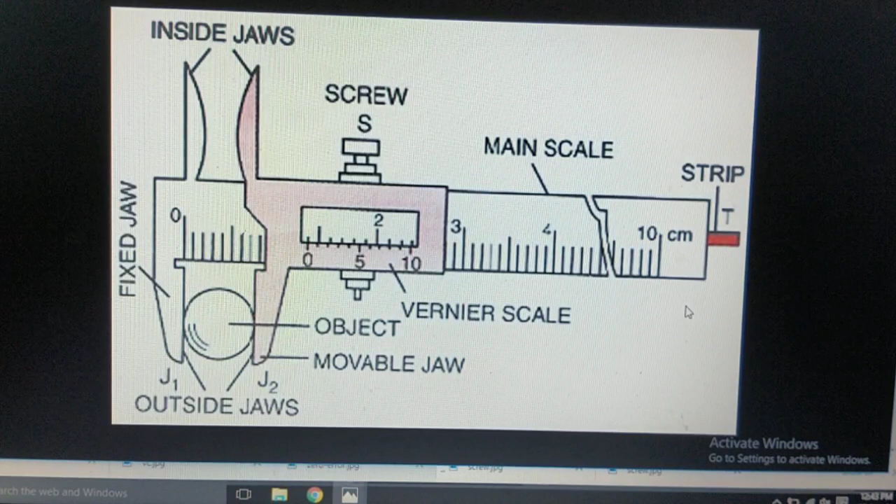Along with the main scale, we had this pink colored vernier scale also, and this vernier scale has divisions on it, from 0 to 10, 10 divisions. The main scale can be as long as depends upon the length of an instrument. Using these two scales, we could measure the outside diameter of an object, and by using these inside jaws, we could measure the inside diameters of an object.

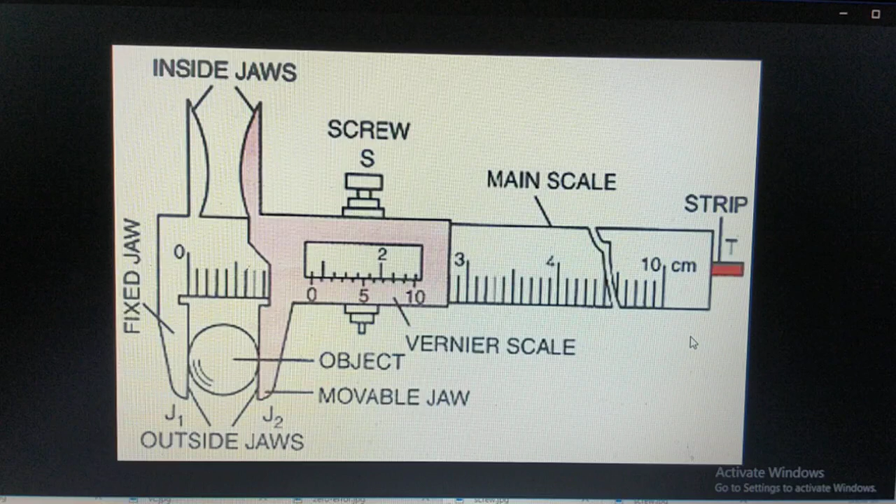These vernier scales helped us to improve our measurement. Like I gave you an example, my measurement was let's say 6 mm, and after using the vernier scale I got the accuracy of 6.7 mm, 0.1 decimal. That means the accuracy has increased by 1 decimal place using this vernier caliper.

Now the second instrument which we will study is screw gauge, to further improve the accuracy of an instrument. Let's say I want not 1 decimal but 2 decimal places, let's say I want the reading as 6.72 mm. So how to do that? And if I want to measure the diameters of very thin objects...

Let's say I want to measure the diameter of a wire. You can see this wire, a very thin wire. If I want to measure the diameter of this wire, how to do that? That can be done by using screw gauge.

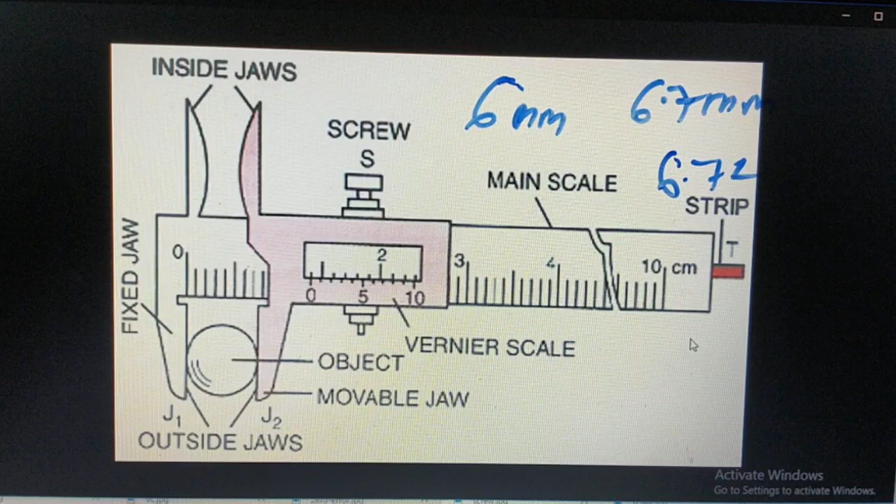So I'll show you the diagram of screw gauge. Keep the textbooks open in front of you and keep looking at the diagram which is there in the textbook also, because ultimately we have to use that diagram. I'll show you the original instrument and the diagram as well. This is the diagram of a screw gauge. You have the diagram in textbook also. Just compare the diagram, we'll see each and every part.

So this part here is called as the stud. Here it is named as anvil. Anvil is another name for stud. In your textbook it is named as stud.

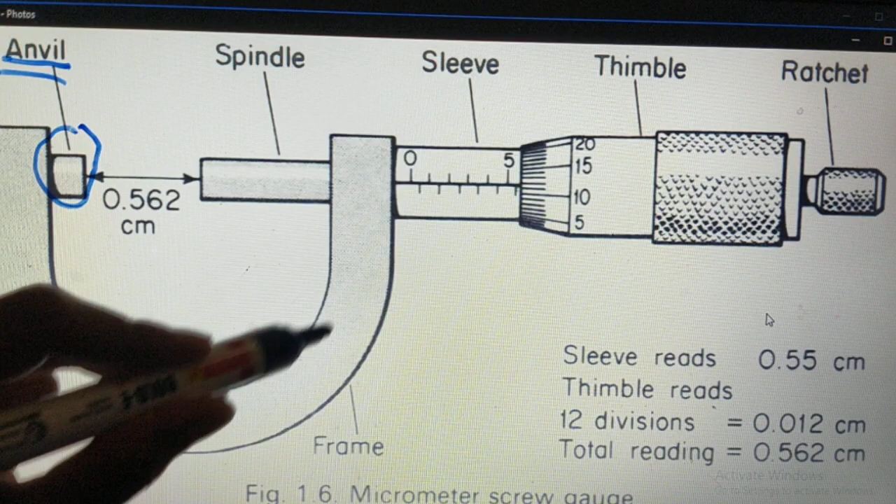Now this is the U frame, U-shaped frame, and you can see two important names here. One is sleeve, and another is thimble. This sleeve is nothing but the main scale. You can see the reading here. Here this is the main scale. And this thimble is the screw.

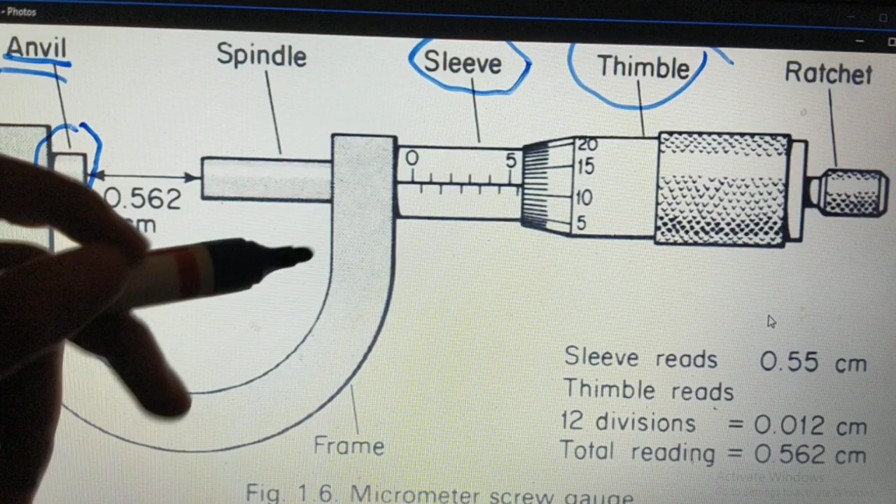How does it work? What is the reading, how to calculate the reading? All this will be done later. Just understand the labeling of this instrument first. So this circular reading here is called as the circular scale, and this part is known as the thimble. Thimble is also called as the circular scale. You have to remember the other name: sleeve is called as main scale, thimble is called as circular scale.

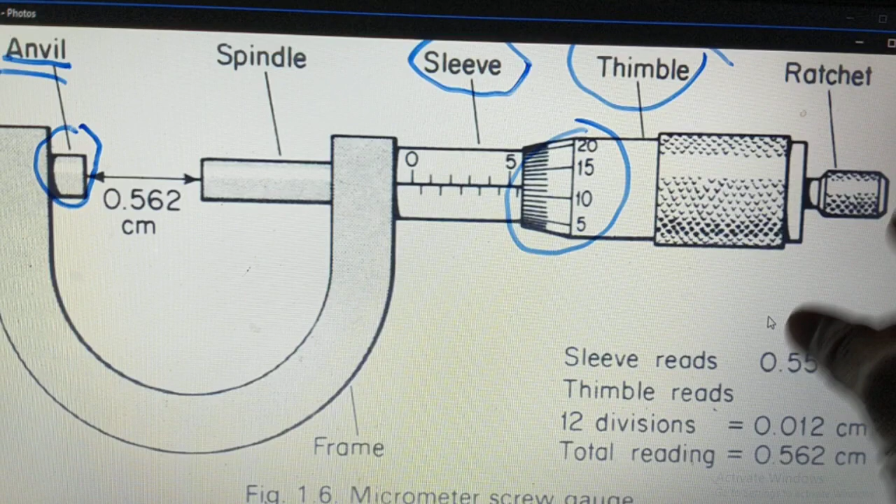Now this ratchet here, you can read the word ratchet. When you rotate this ratchet, like when I rotate it like this, the screw will move ahead. We'll see the demonstration. When we rotate the ratchet, the screw will move ahead. So this part here, you can see the spindle. This spindle will move inside and outside depending upon the rotation of this ratchet.

The object which you place is kept here between the stud and the spindle. Depending upon the size of the object, you will rotate this ratchet and this screw will move, and we will keep the object here. So I hope the labeling of the screw gauge is clear to you. This line of the main scale is also called as the base line. In the diagram in your textbook you can see the base lines, and this spindle is nothing but a screw.

Here there are marks like a screw here, and once again I tell you, this thimble is the circular scale and this sleeve here is the main scale.

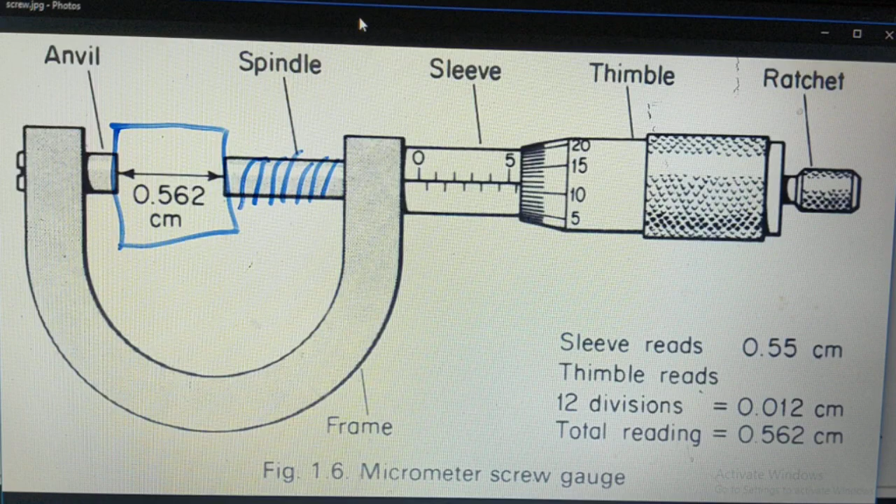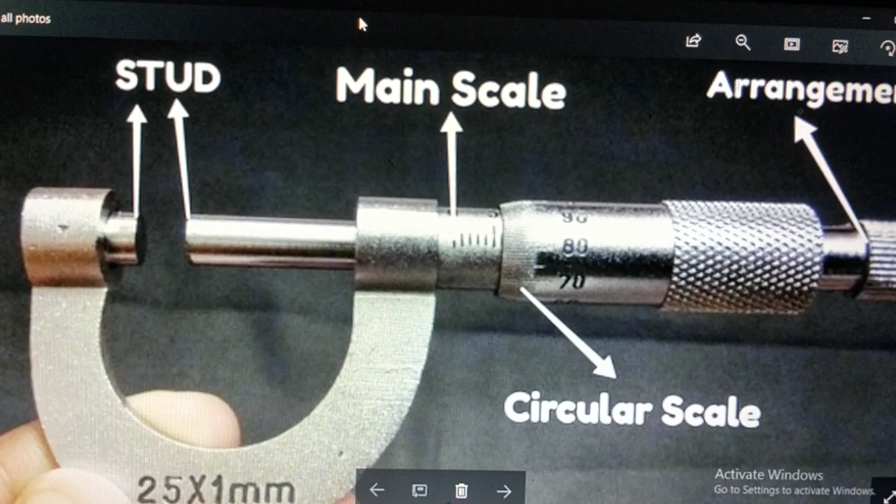I'll show you another diagram of a screw gauge. See, in reality a screw gauge looks like this. It is silver in color, and you can see here that how there is a space here. When we move this ratchet, see, this is a screw like object. When you move this, the screw will move inside and you will keep the object here. Object will be kept here. This is the U frame.

This is the measurement, the maximum measurement up to which the screw gauge can work. And you can see this main scale. This is basically I wanted to show you the color of the screw gauge and how it looks. It is made up of metal.

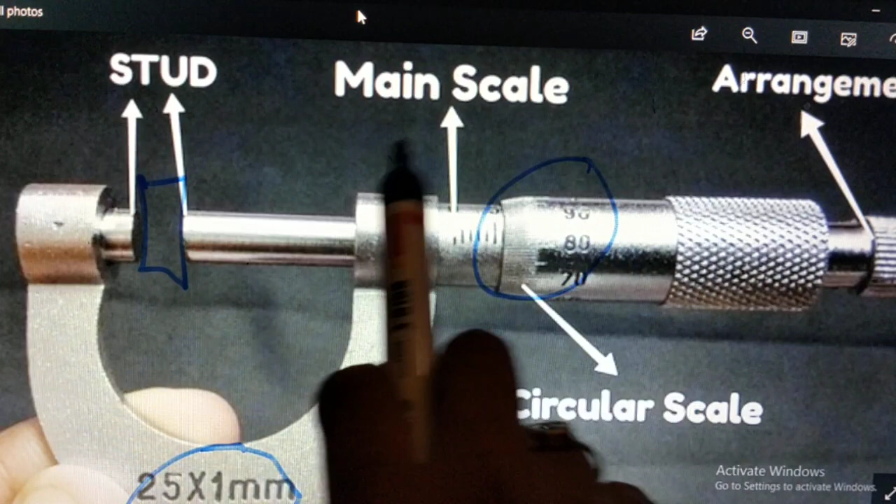This circular scale is very important. The main scale gives us the basic reading of the screw gauge, and the circular scale gives us the reading after the decimal point - the accurate, extra reading we get is because of this circular scale. So let's start with the working of the screw gauge now.

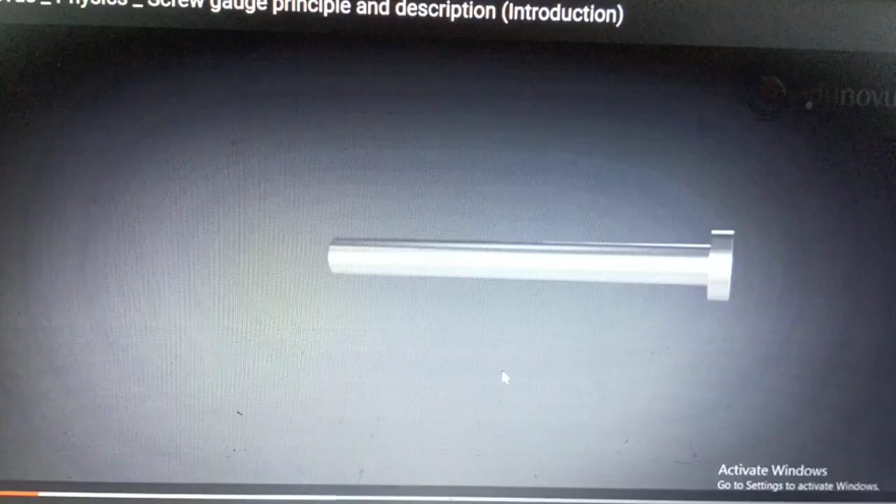You can see this, a normal screw. Using this screw, I will make you understand the working of the screw gauge. Since we are all stuck at home, it is not possible to show you the actual instrument, so I have tried to source many videos and pictures from YouTube to explain the concept. So this is a basic screw here.

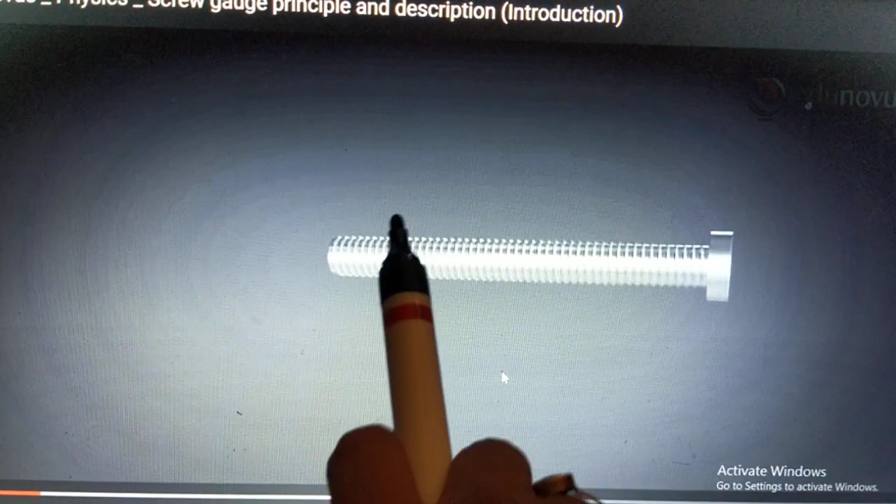This screw has these lines on it. I'll show you these lines on the screw. These lines are called the threads on the screw.

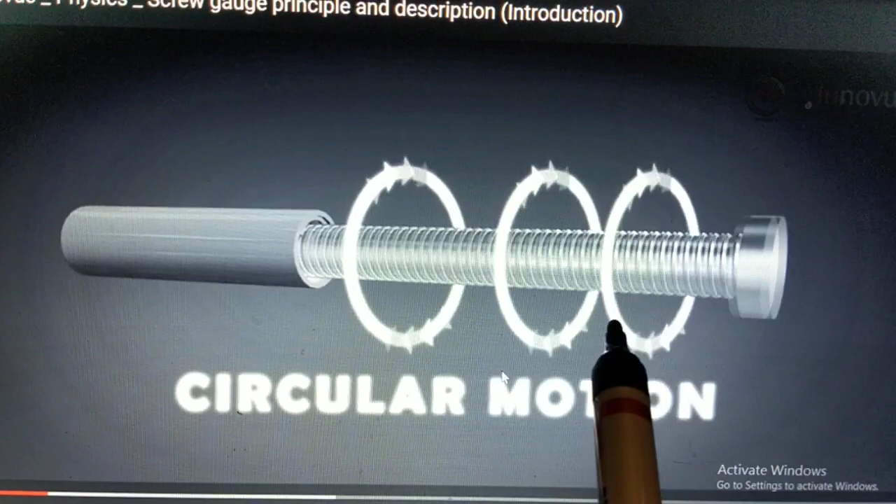Now when you rotate the screw, the screw moves inside the object, whichever object you have. See how it is done - you are rotating the screw. This is the rotational motion, and let's say the screw was here and it reached here. You can see after this rotation, the initial position of the screw was here, and now it has reached here after rotating.

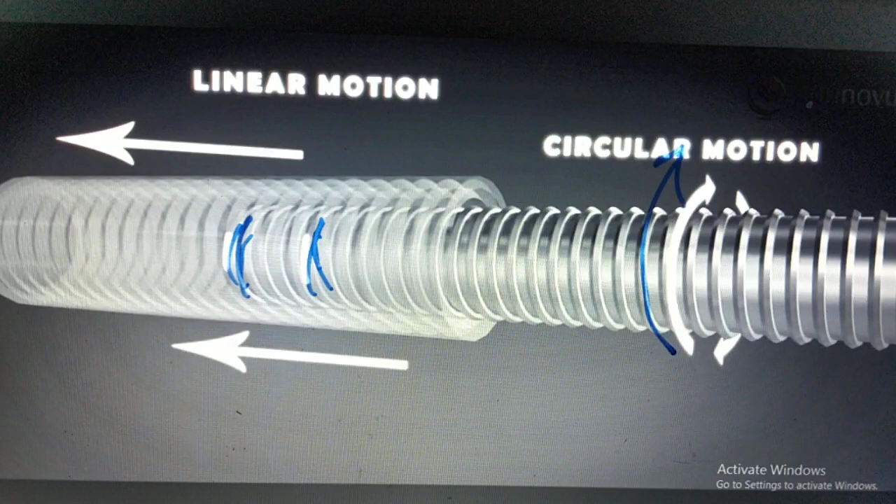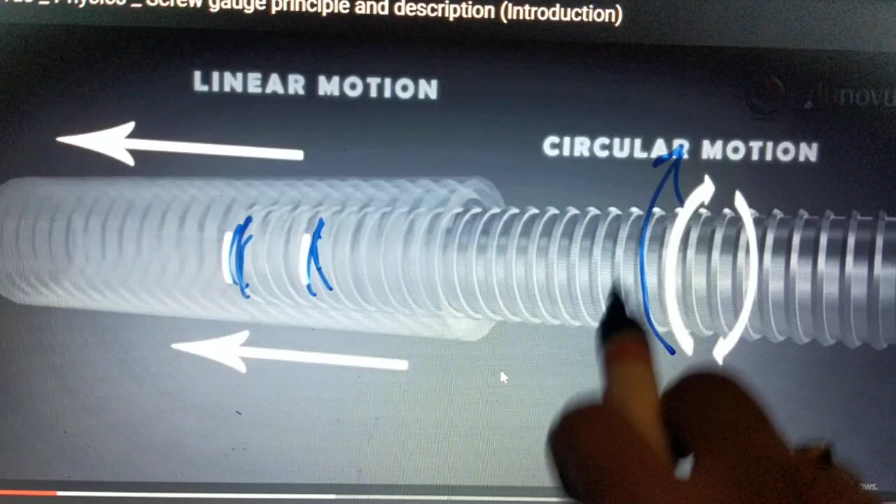After the rotation, it has moved from the initial position to the final position. These positions of the screw after rotating - this is circular motion, and we are getting a linear motion here. This distance which the screw travels in one rotation is the distance traveled by the screw when we rotated the screw once.

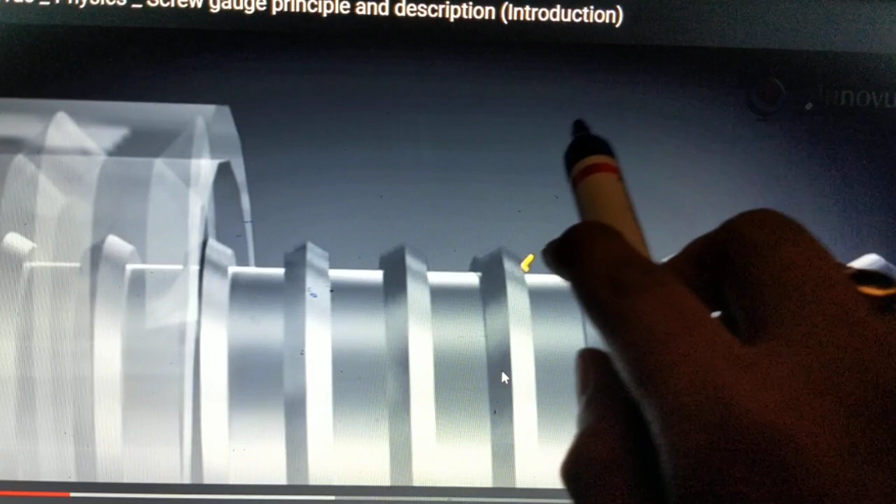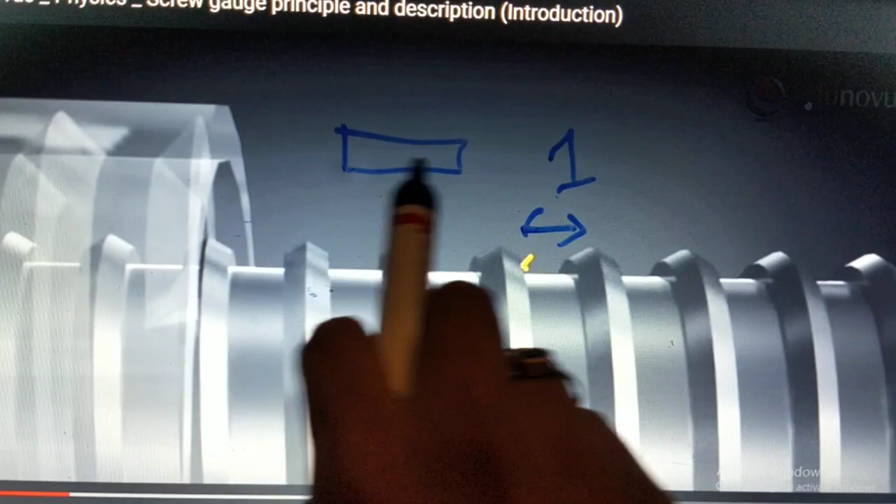But let's go deeper into it, let's take a closer look. These are the consecutive threads of the screw, and when you rotate the screw one time, it travels this much distance. Let's say this is a screw - when you rotate this screw once, it will move some distance inside. How much is that distance? This is the distance between these two thread lines.

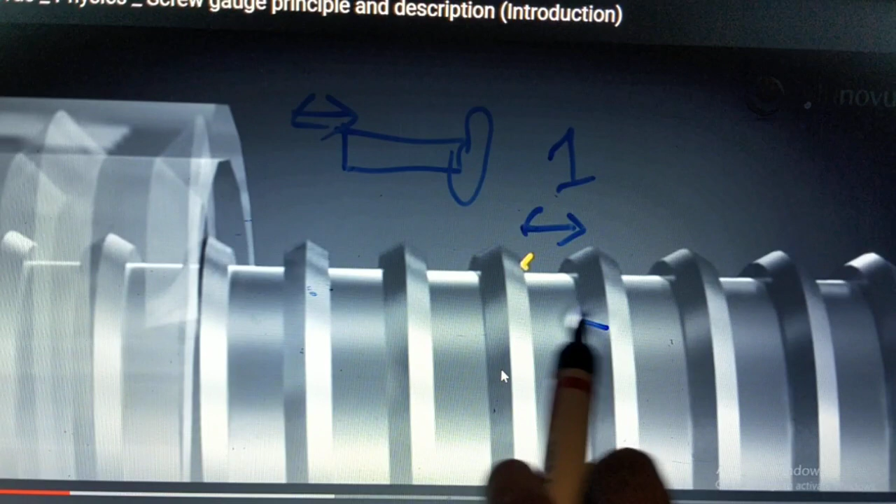In easy language, if I explain to you - this is a screw, and if you rotate it once, one rotation, it will travel this much distance. Then on the second rotation it will travel this much more distance, on the third rotation this much, on the fourth rotation this much. So it covers one thread per rotation.

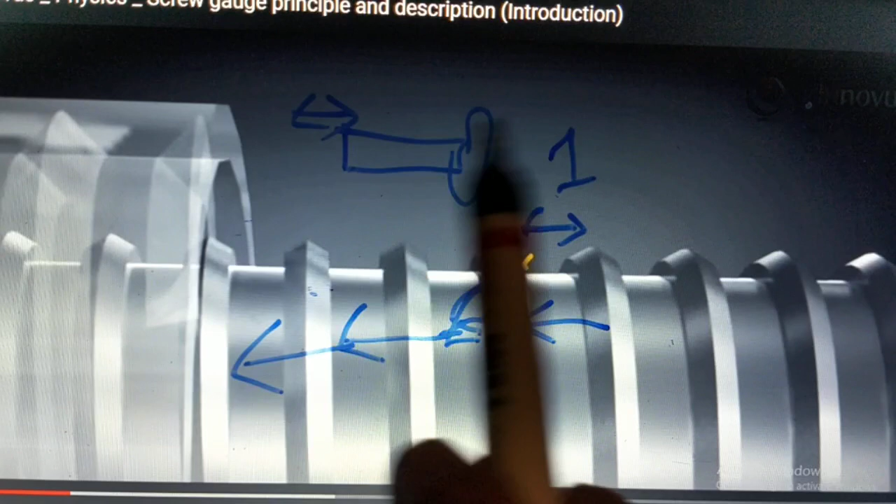So what is the significance of this? This distance which the screw travels in one rotation is called the pitch of the screw. Pitch is a very important part in the screw gauge, that is why I showed you this video - what is pitch, it means the distance traveled when we rotate the screw once. The definition of pitch is: the distance traveled by the screw in one rotation is called the pitch.

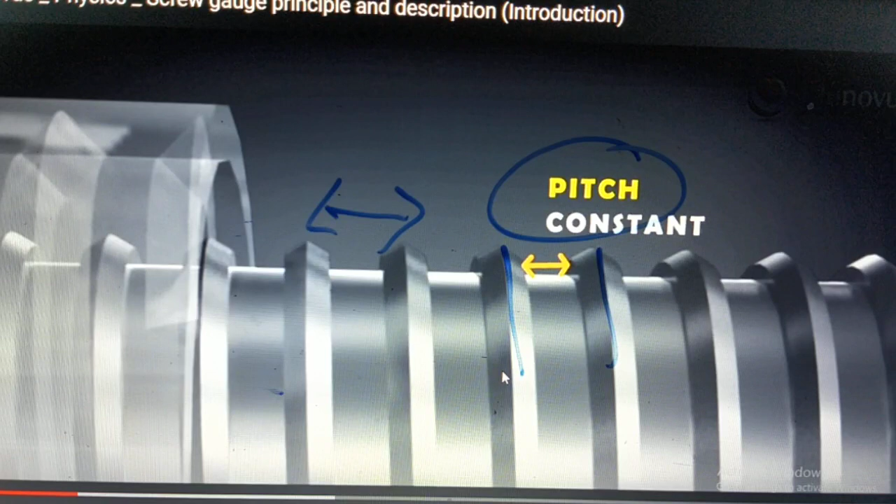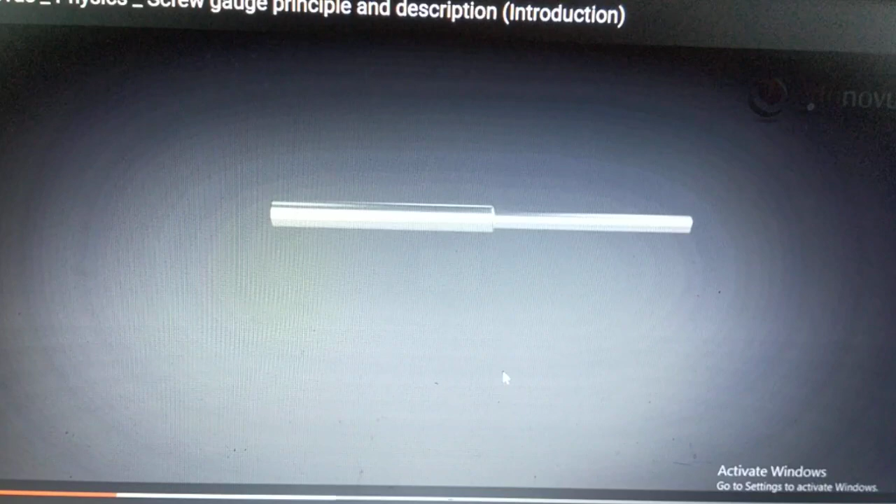So here you can see this is the distance. Now let's understand how this screw is fit inside the screw gauge. See this part now - you can see the screw fit inside the part, and this makes the main scale of the screw gauge. This part is the main scale of the screw gauge. Further, it has readings on it, and along with this main scale we have the U frame - this is the U frame.

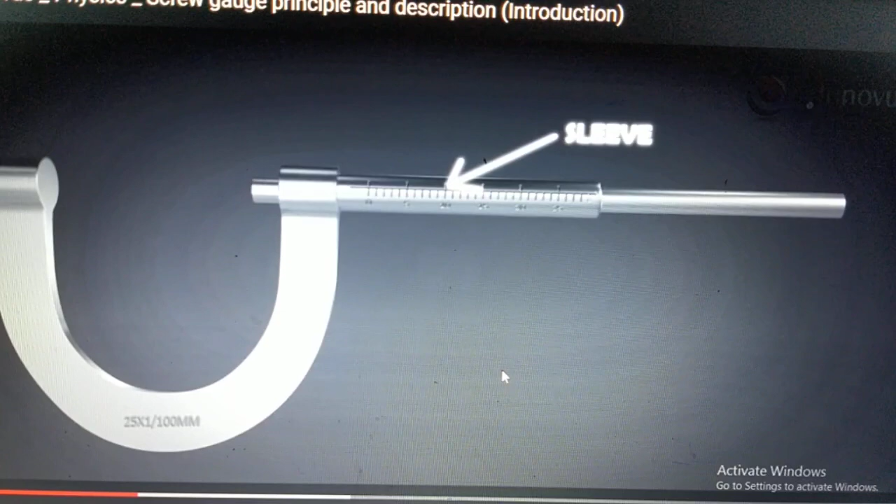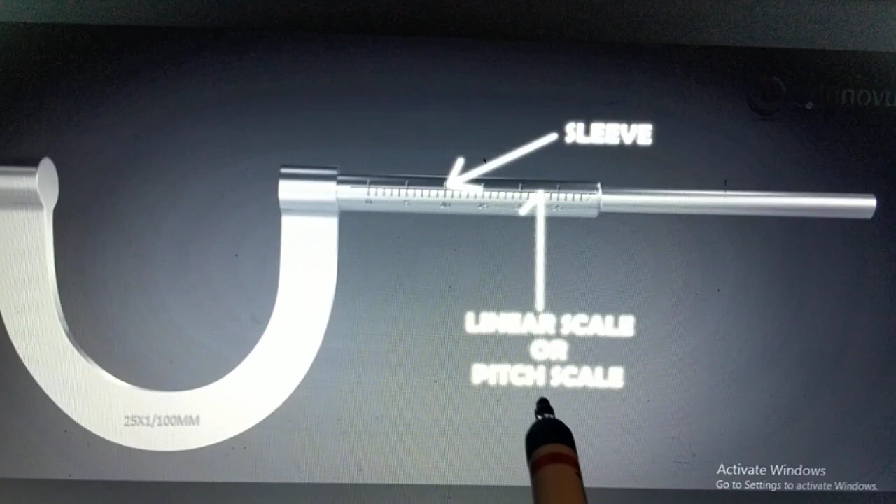You can see the readings here. I'll make you understand how these readings work. This was the main scale, which we call the sleeve - so this is the reading of the main scale. So you understood what is a sleeve - the sleeve is this main scale. This main scale is also called the linear scale or the pitch scale, linear because it moves in a horizontal direction.

Here is the stud - you keep the object here, we fix the object like this. You saw this is the object, this is the stud, and this is the spindle. When you move the screw from here, you fix the object. Now how to move this screw? By using the ratchet.

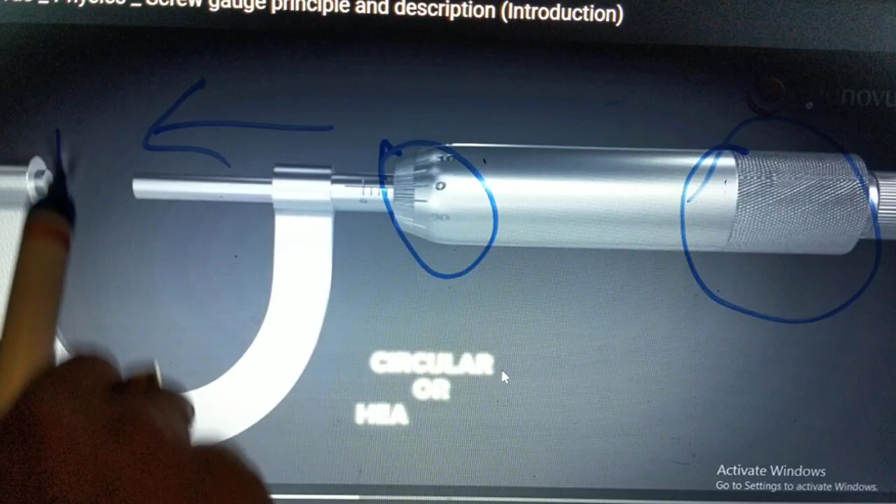So you will see how we place this, which is made here - it's the circular scale, and this is the ratchet. You can see this part, this is the ratchet. Using this ratchet I will move the spindle, and it will move left and right, in and out, depending upon the size of the object. Now this measurement here is called the circular scale or the head scale.

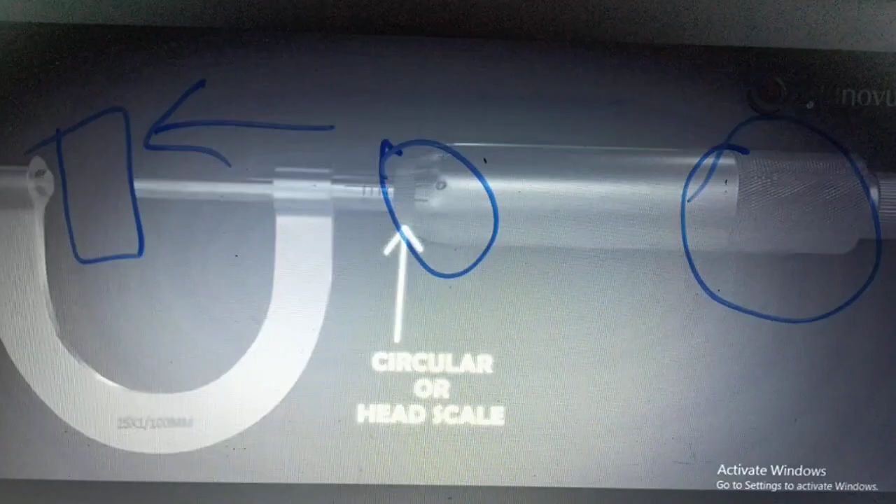Now, by doing an experiment, let's understand how to measure the size of an object using a screw gauge. For that, I'll show you another video.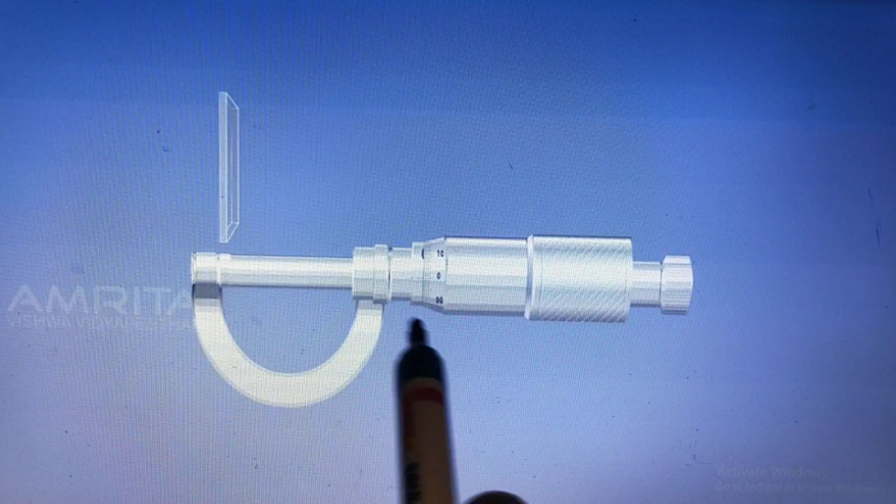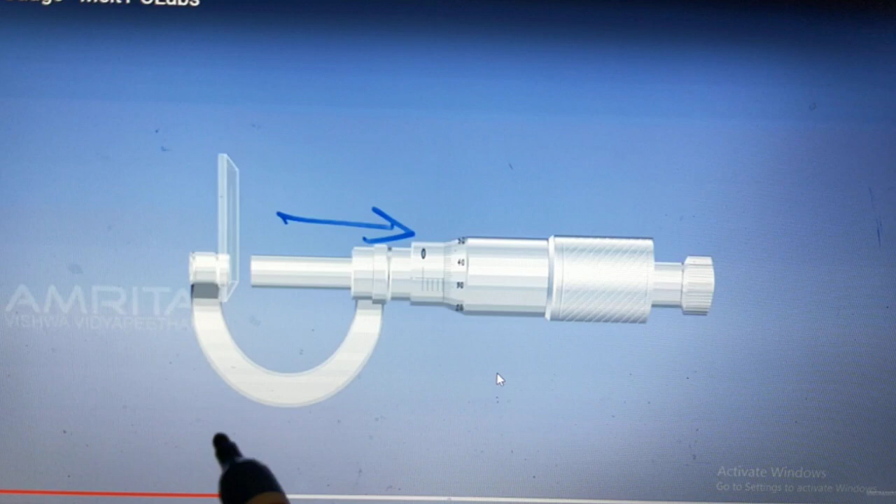See, this is the U frame, and we will place the glass here. We rotated this ratchet, so the screw moved outwards, and we will place the glass slab here, this piece of glass. Okay, and I want to measure the width of this glass.

Now we will tighten the screw. Once it is fixed, once this measurement is done, now let's learn how the reading is taken. How do we read the numbers from the screw gauge?

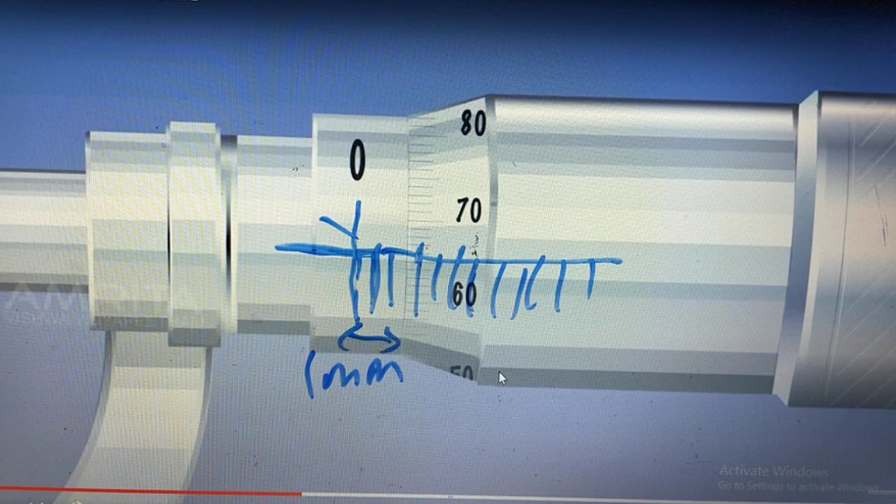I told you before that this is the main scale, the main reading. This is the zero line, first line, second line, and it is inside this screw. The remaining readings are the main scale readings, and they are inside the screw. The distance between these two lines is 1 mm.

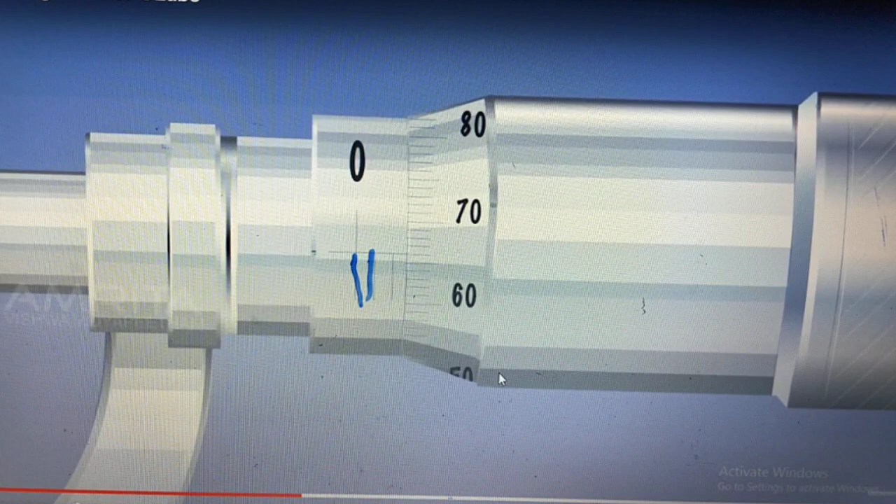Now once we have placed the object, we will see what the reading is on this main scale. How to count the reading? See, this is 1 mm, this is 2 mm, and after 2 mm I don't have a line, it is hidden. So the reading on the main scale in this case is 2 mm. I can count 2 lines, so that means the reading is 2 mm.

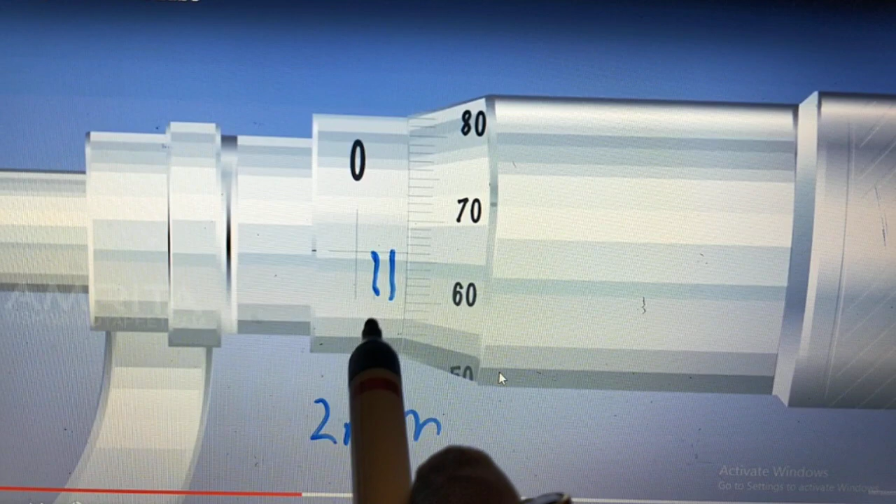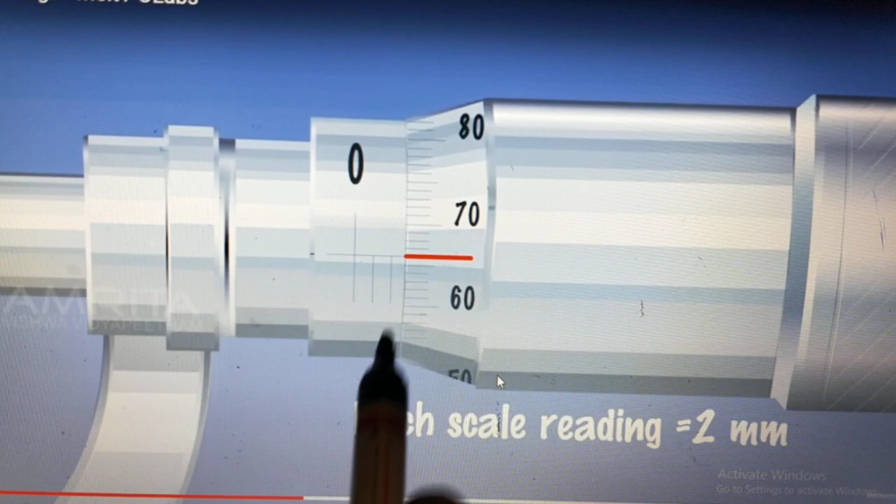Now let's see how to take the circular scale reading. This reading is also called the head scale. As I told you, the main scale is also called the pitch scale. See this, you can see the pitch reading. This was the pitch reading, and now when you have rotated the scale, the numbers have changed.

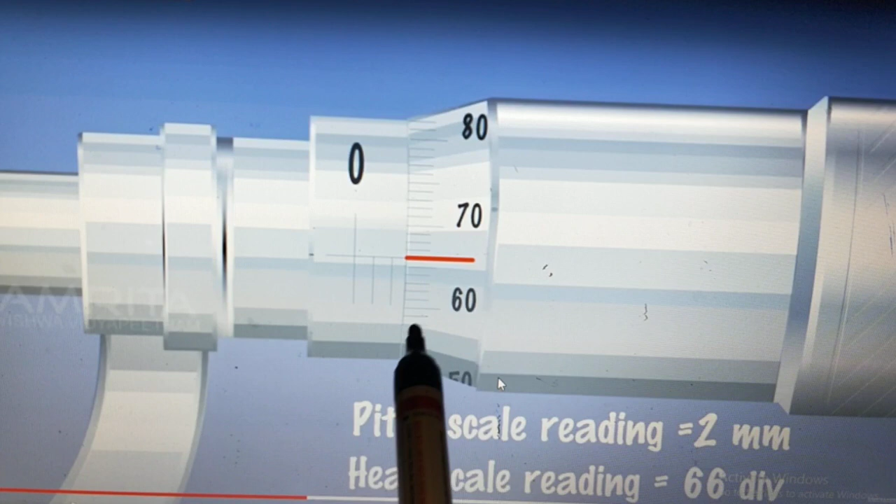You have to see which reading on this circular scale is coinciding with this baseline. When we are rotating this screw, you had rotated it, and because of the rotation the reading here changed. Now we have to see that this line is coinciding with the main scale, so according to which we'll take the reading. First this is the pitch scale reading, 2 mm, and here when we count the division, this is 60, then 61, 62, 63, 64, 65, 66. So this division, the 66th division, is coinciding with the baseline.

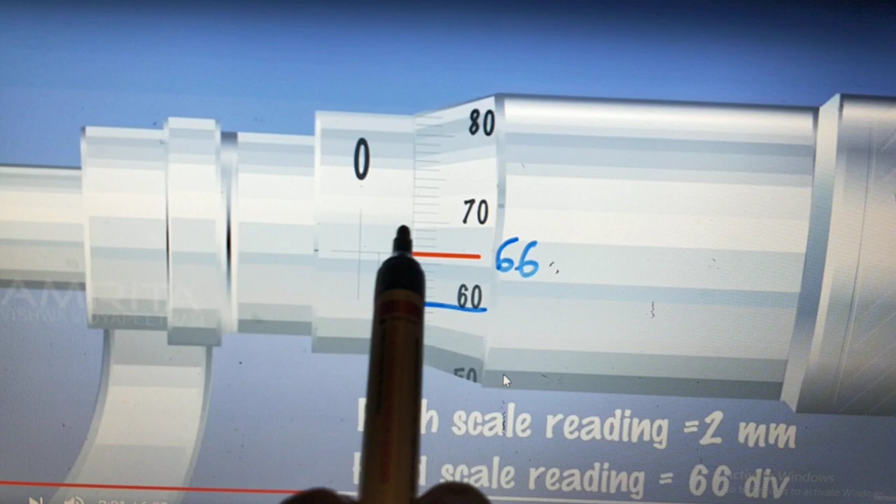So here it is written the pitch scale reading is 2 mm. Pitch scale means main scale, and the head scale means circular scale. This is the circular scale. This reading is 66 divisions.

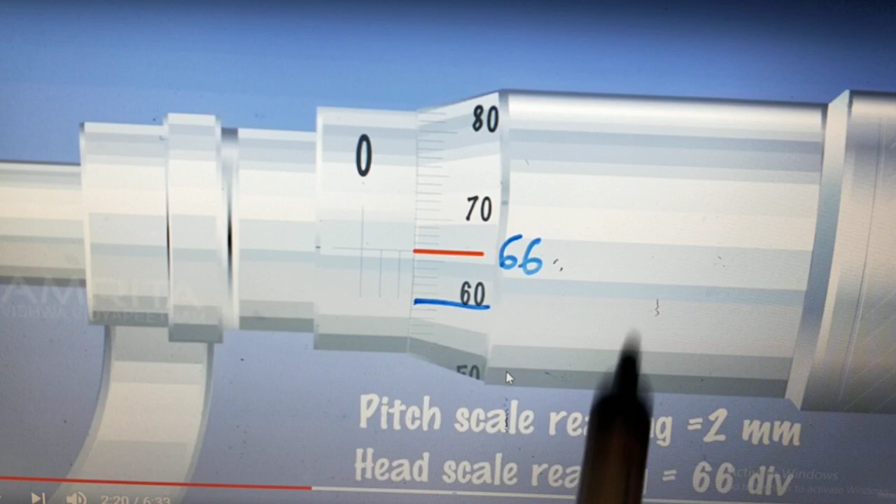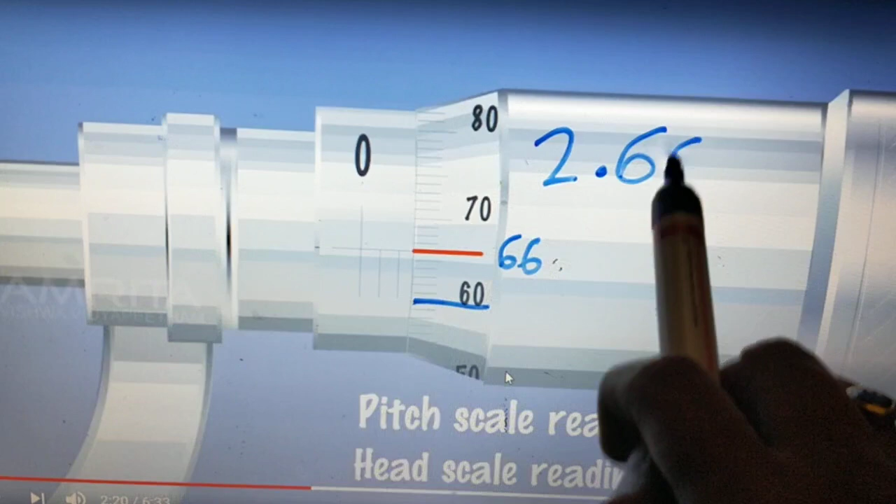Now how to write the final reading? We know that the main scale reading was 2 mm, correct? And here which division is coinciding? The 66th division. That means the reading is 2.66 mm. Normally our main scale would have given us the reading as 2 mm, but by using this screw gauge we got an accuracy of 2 decimal places. Now the reading is 2.66 mm.

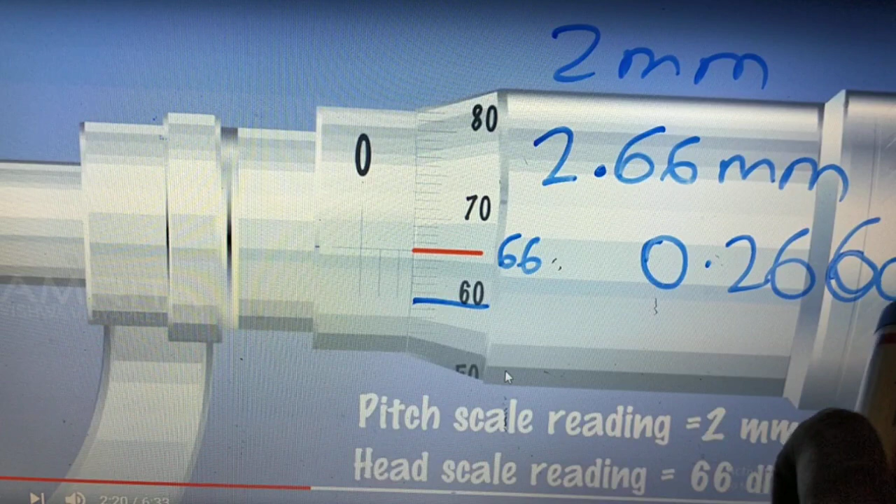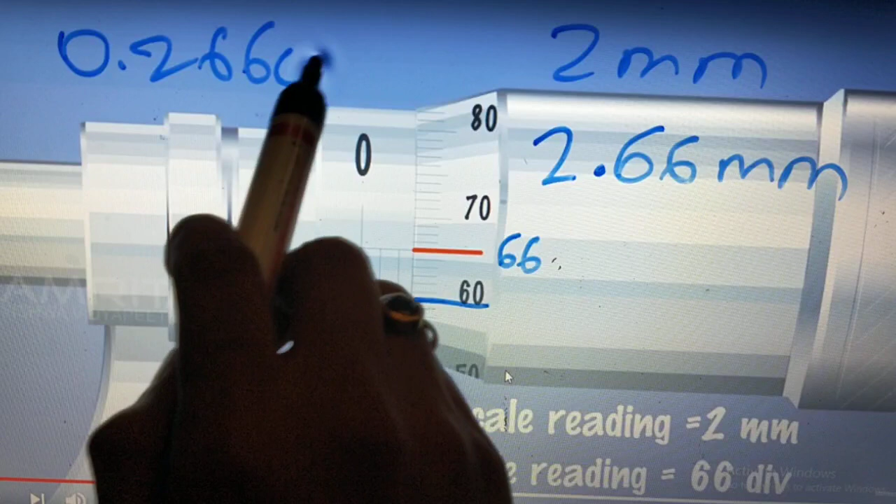If you convert this reading into centimeters, it will be... I think it is not visible, just a second. When I convert this into centimeters, I will get the reading as 0.266 centimeters. When you convert into centimeters, the decimal place is shifted to the left hand side.

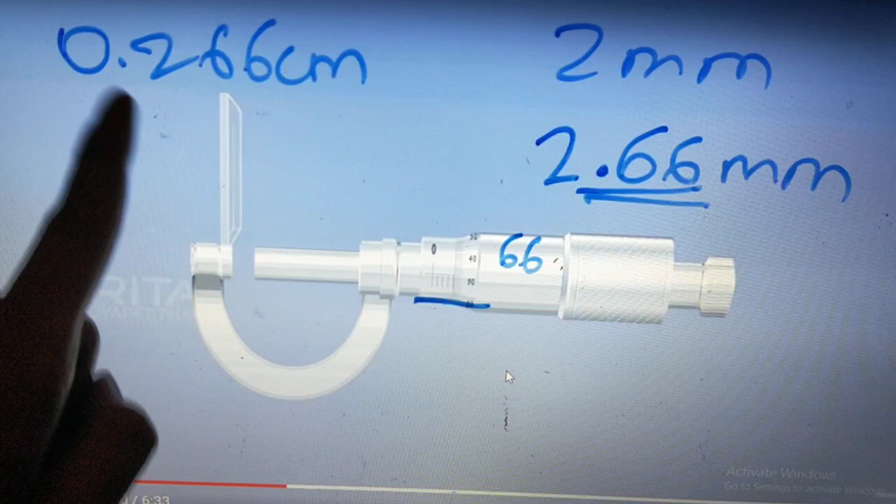So you understand that by using the screw gauge method, our accuracy has increased by 2 decimal places. Let's take one more example. This was the example of measuring the width of a glass plate. If you remember, we had inserted a glass plate here and measured its width. You have to understand that the width is very less, so this 0.266 centimeter - the width of a glass is always very less.

Let's see how to measure the diameter of a small sphere using this screw gauge. This is a very small sphere. We will place this sphere here by moving the ratchet.

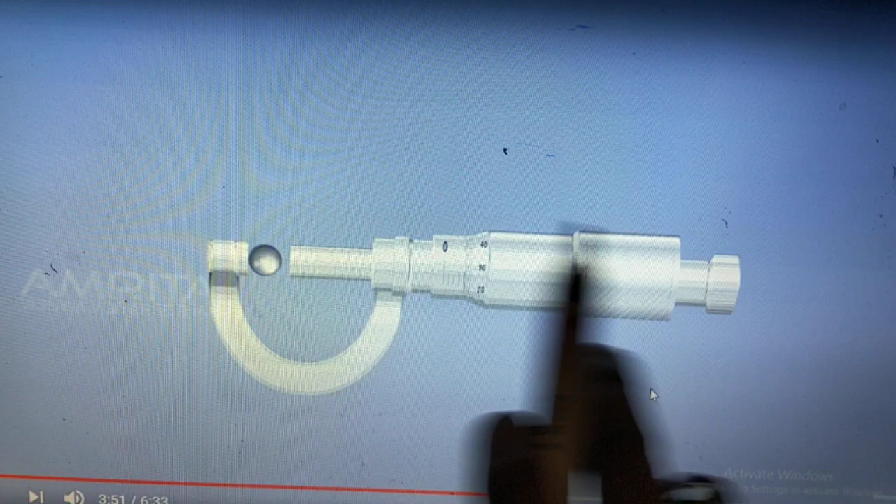See this. When we moved this screw, the ratchet is used. The ratchet is turned and the screw is moved, and we place the ball here and fix the screw now.

Now it is fixed, and according to this the reading here changes. See, if you observe the circular scale, it moves and changes the reading.

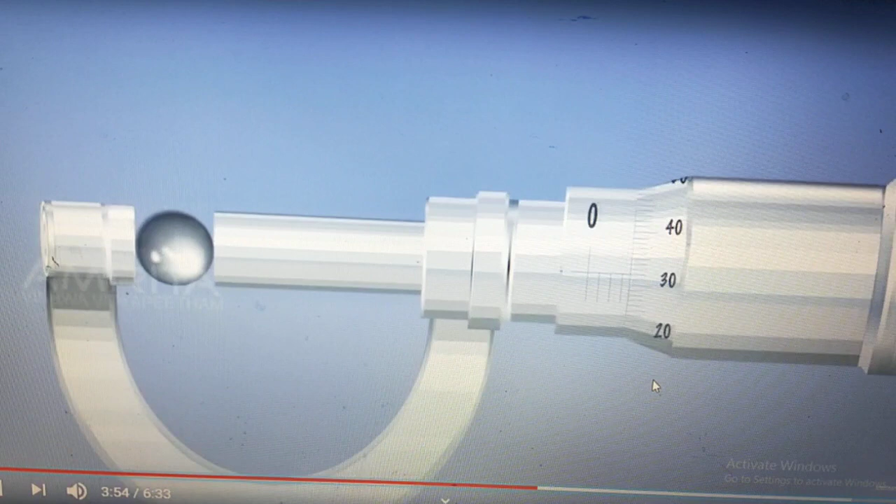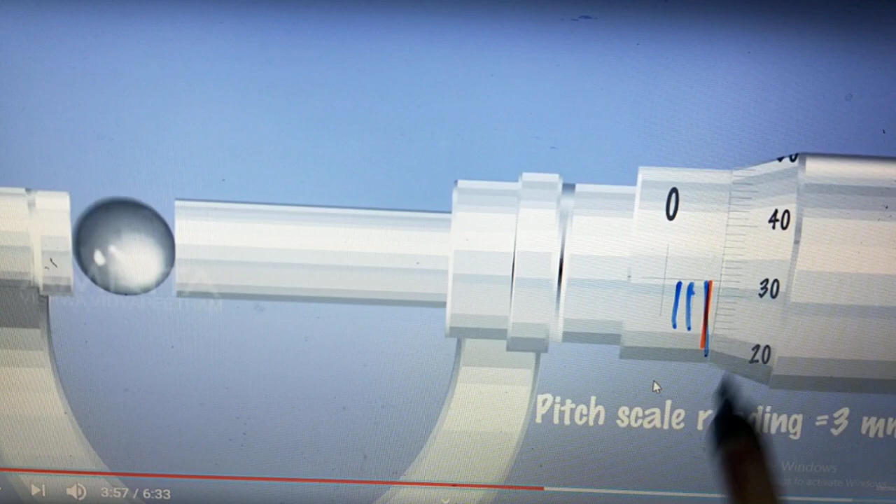Now let's zoom in and see the measurement. First we count the main scale reading. The main scale reading here is 1, 2 and 3 - we can see 3 lines. That means the main scale reading is 3 mm, which is also called the pitch scale reading.

This is also called the pitch scale reading. It is 3 mm in this case. So this is the main scale reading, 3 mm. Now let's see which division is coinciding with the main scale.

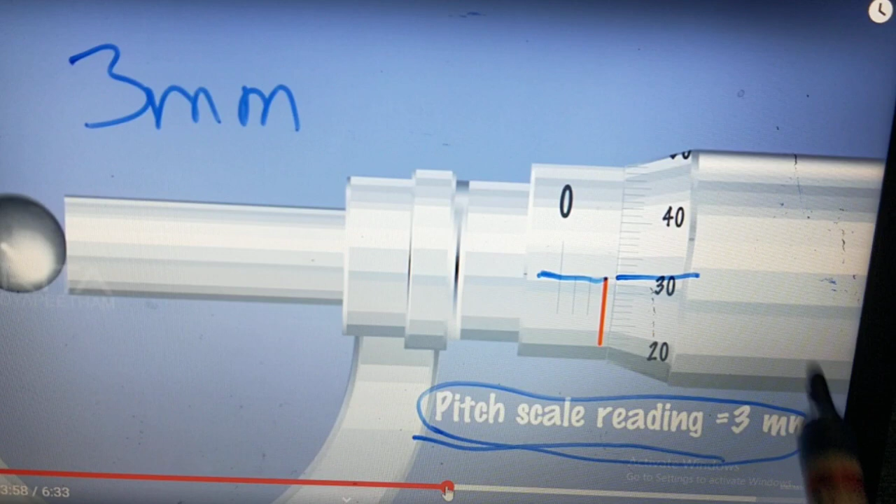So which division is this? Let's see, this division is coinciding, and it is the 32nd division coinciding with the main scale. The 32nd division is coinciding. That means the measurement is

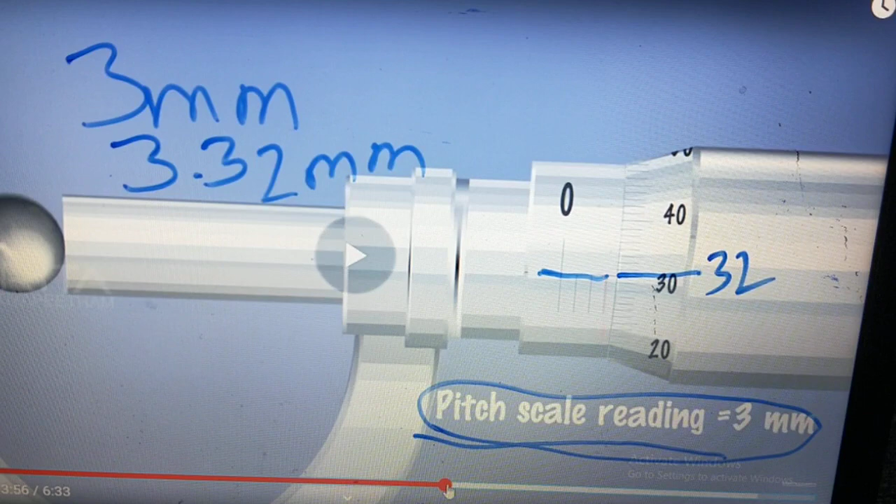3.32 millimeters. And if I convert this 3.32 millimeters to centimeters, I will get 0.332 centimeters. Pardon my handwriting, because I am not able to write on the screen.

So you see the pitch scale, that means the main scale reading was 3 mm, and the head scale, this circular scale reading, was 32 divisions. You have to just see the divisions made here, many divisions, and see which division is coinciding with the zero scale division. So mark that value - the value is 32, just write it as 3.32 mm.

This is how, using this screw gauge, we can measure objects.

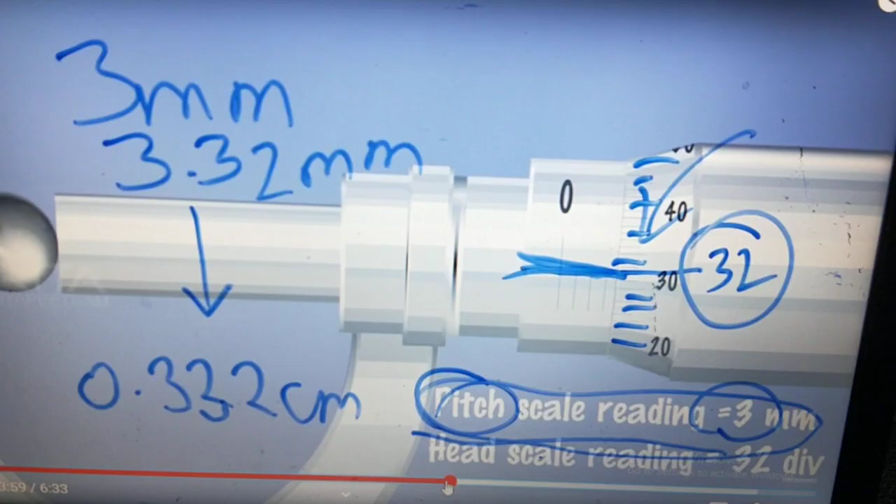I want to show you one more experiment, and this time we'll see how a real screw gauge is used. The previous graphics were animated, so now we'll see how this real screw gauge is used to measure the width of a glass.

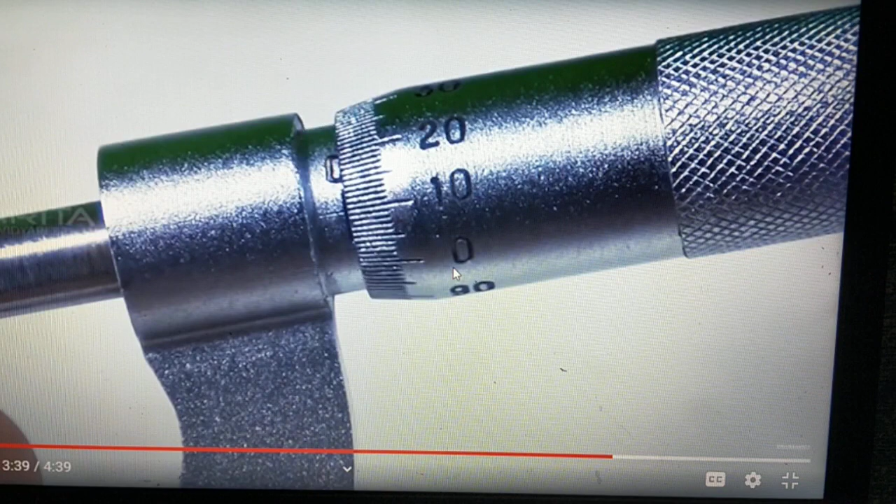Okay, so let's see. This is a piece of glass, we will insert this piece of glass here, and by using the ratchet I will fix it. See, rotating the ratchet, and now let's take the reading.

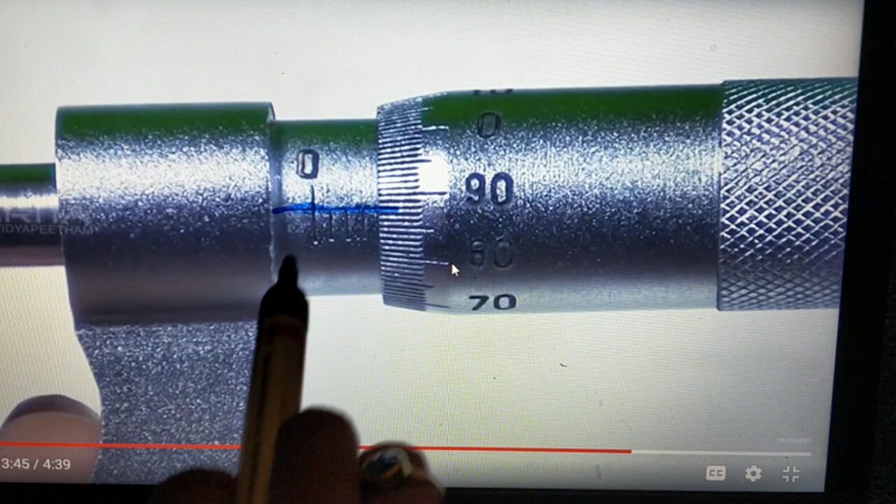See, this screw gauge - this is the main scale. Let's see the reading. 1, 2 and 3, I can see 3 lines here, that means it is 3 mm. Correct? I'll put a decimal place here, and see which division is coinciding.

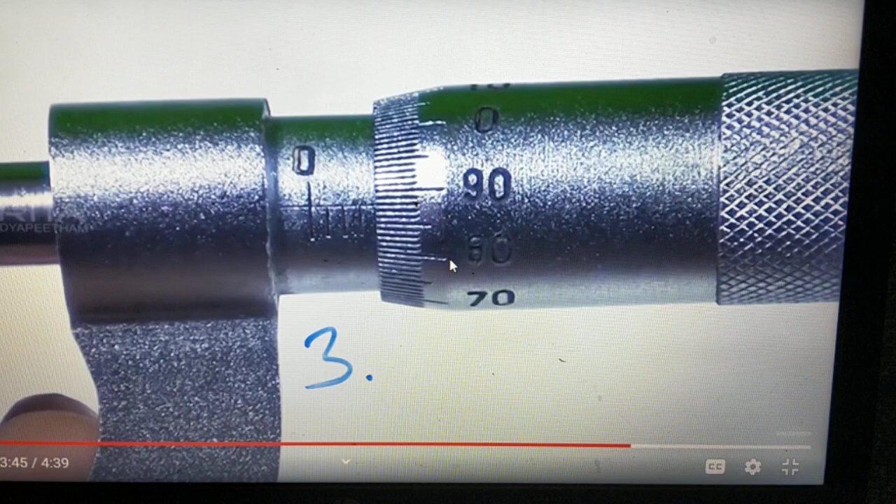Now, which division is coinciding? If I observe, this division is coinciding, and it is the 88th division. The 88th division is coinciding. That means the reading is 3.88 mm, or in centimeters you can say it is 0.388 centimeters.

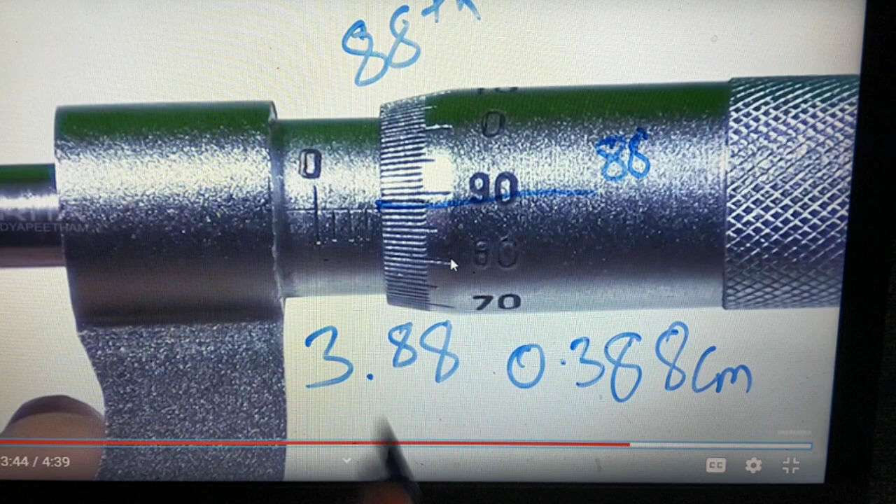I hope you have understood how you keep the object inside, rotate the screw gauge and see the readings. It's very simple. This is the main scale - count the lines, 1, 2 and 3, that means 3 mm, and just see which division is coinciding. That division, just place it after the decimal point.

See, in reality, these calculations are not so easy. This is a trick which I have taught you, how to write the readings. When we do the numericals, most of the time the numericals are cancelled, because in the syllabus they have mentioned no numerical problems. But actually when you do the numericals, there are many parameters which change.

So you will study in higher classes, probably in your junior college, about how to use these instruments. In school also, I expect that your teachers must take you to the physics lab and show you these instruments for real practical, so you'll understand how to manage these objects.

Now that's all with screw gauge. In screw gauge you have to study the functions of different parts of the screw gauge, and you have to understand the circular scale, main scale, U frame - that's it. One more thing about screw gauge is the zero error.

I'll show you what is zero error. It is similar to what it was in the vernier caliper. In vernier caliper, if you remember, see, this was the zero of the main scale in vernier caliper.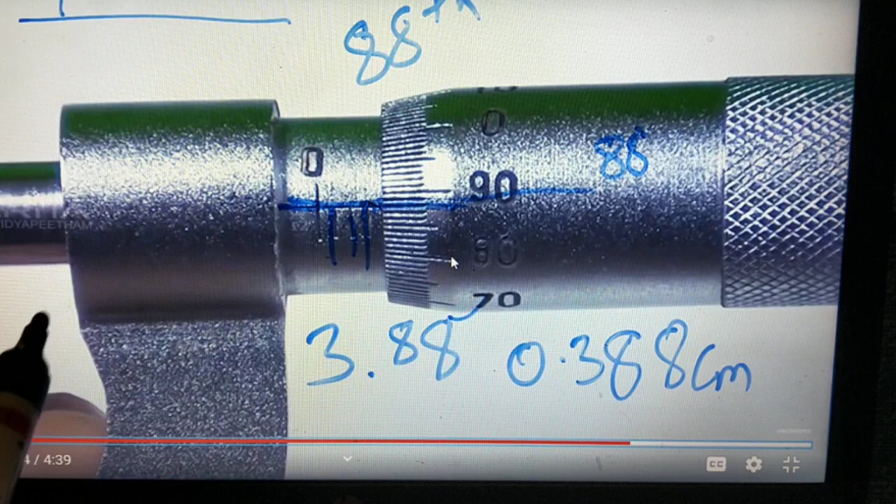See, this was the main scale, let's say, and this was the zero of the main scale, and the zero of the vernier should coincide with the zero of the main scale. If the zero is here, it is called positive zero error, and if the zero is after the main scale zero, it is called negative zero error.

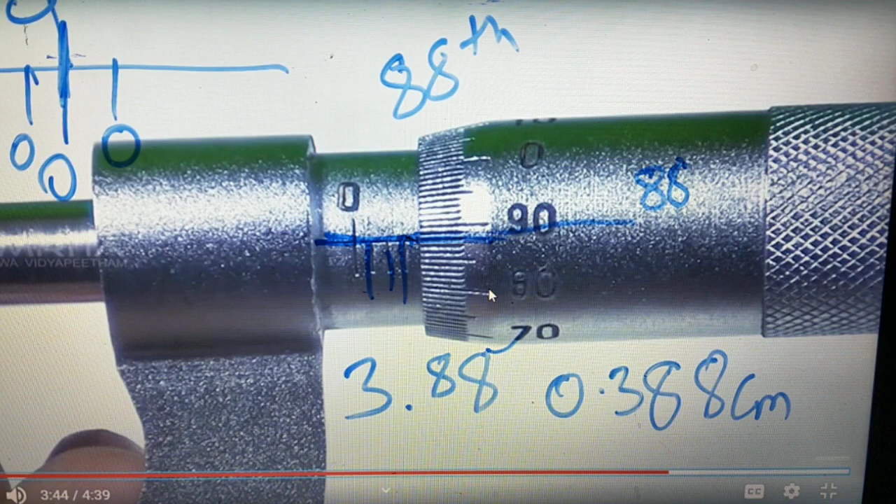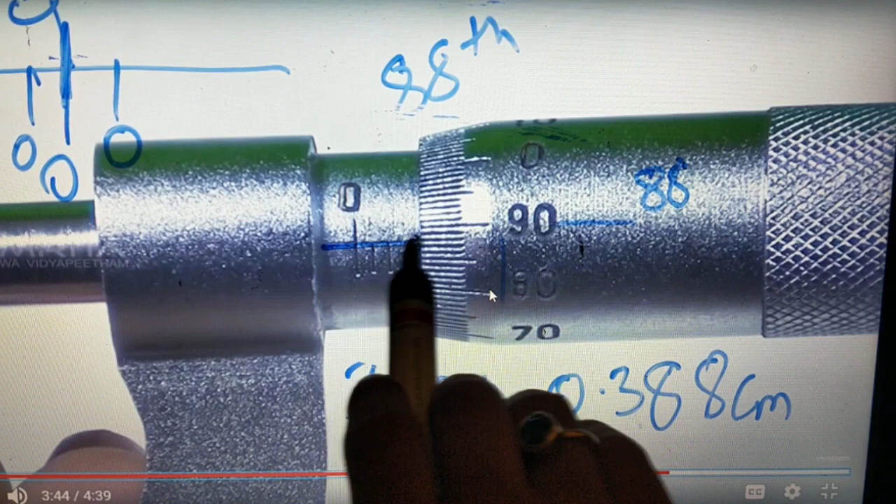So in a similar manner, in screw gauge we have zero error. See, when there is no object here, this circular scale reaches till here, and the zero of this circular scale coincides with the zero of the base scale, because there is no object, so there will be no reading. You have to understand that when there is no object placed, this baseline will coincide with the zero value. I'll show you one picture here.

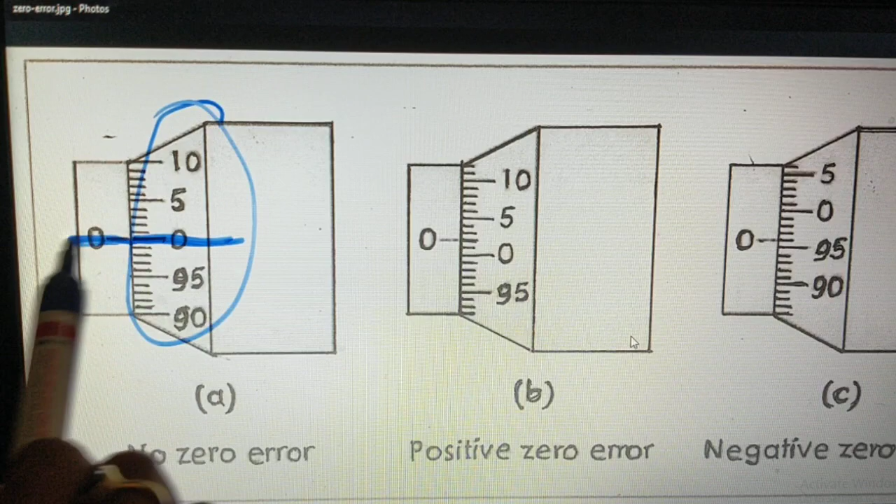See this picture. So this is a normal screw gauge, and here you see when there is no object, this is a perfect screw gauge where the zero of the circular scale is coinciding with the zero of the base scale. So there is no zero error. This is a perfect screw gauge, good to use.

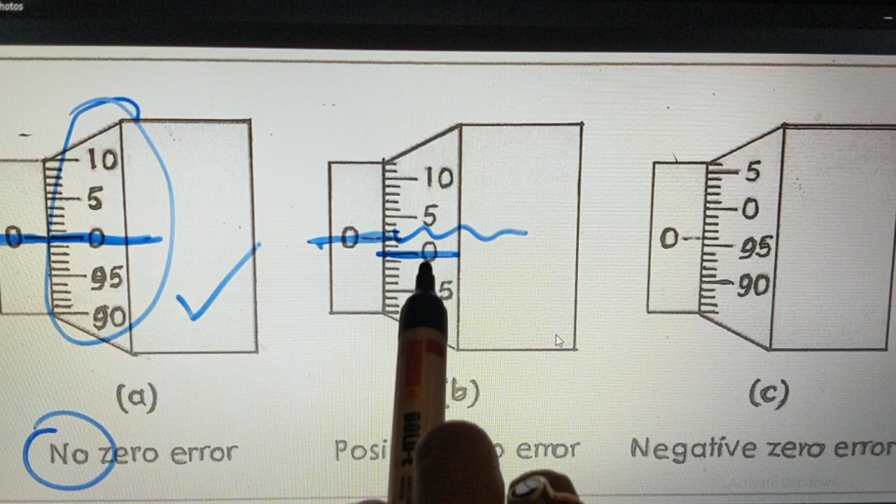But if there is no object and still the zero of the circular scale is not coinciding with the zero of the main scale, it should be here, it should actually be here, but it is down. So when the zero of the circular scale is below the zero of the main scale, we call it positive zero error.

And this is negative zero error. You can see the zero of the circular scale, this is the circular scale and this is the main scale. So the zero of the circular scale is above the zero of the main scale. This is called negative zero error. Why negative? Because we add it, positive because we subtract it.

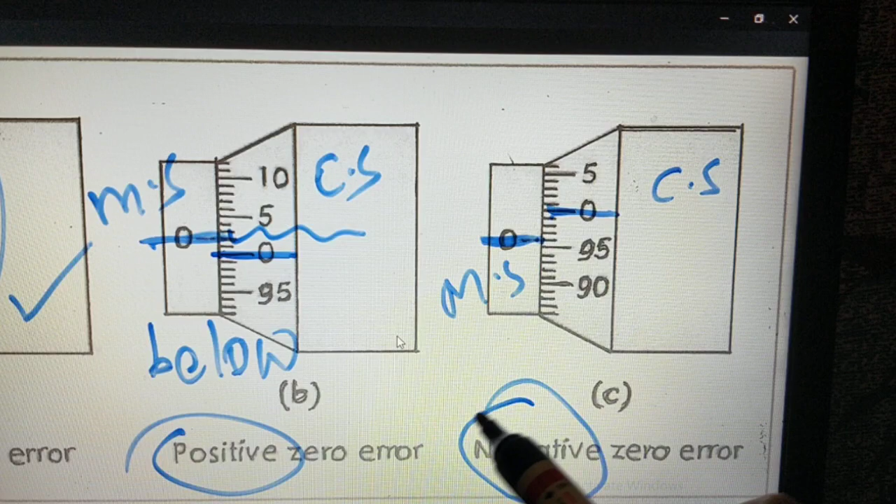But those types are not important for us. We just have to understand the concept here. So I hope zero error is clear to you, that this is all what we have in screw gauge. There is one more thing in a screw gauge, that is the backlash error.

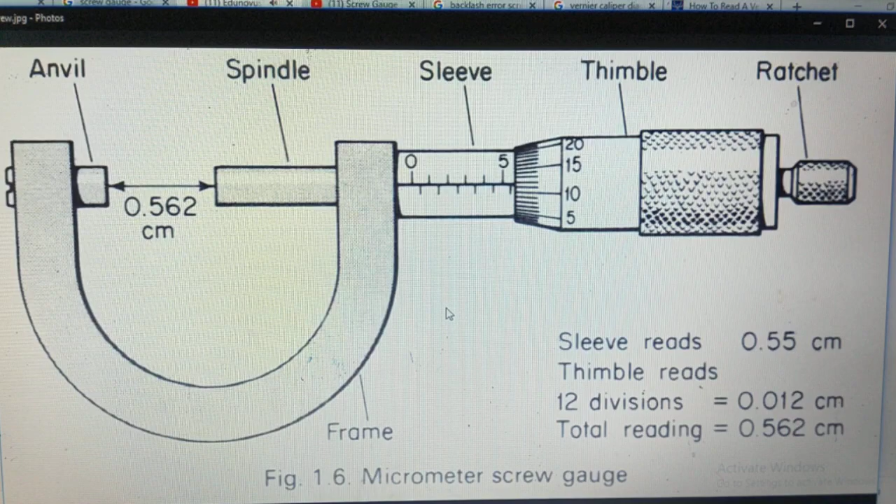Very important, very small topic although, backlash error. Now what is this backlash error in screw gauge? See, because of the wear and tear of an object, for example, if you have the screw gauge and this ratchet which you use to rotate it, if you are doing it very fast, sometimes what happens is you have completed one rotation, but this reading here has not reached from 0 to 100, because you are doing it very fast.

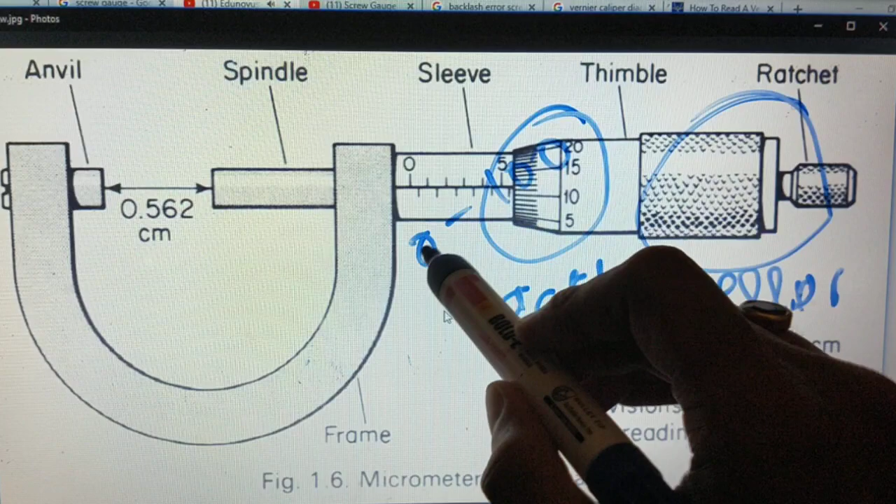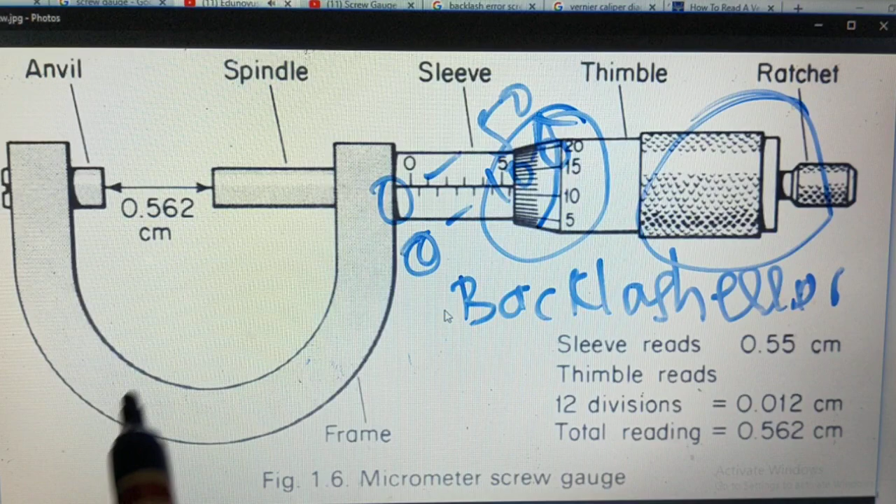This reading sometimes is going from 0 to 50, but you have already completed one rotation. That means there is some error here. You should slowly rotate the screw gauge so that the screw also has time to rotate properly. But sometimes when the screw gauge is very old, or because it is metal, because of wear and tear, or there is some damage in the screw gauge, what happens is that even if you are rotating the screw gauge, the screw doesn't move ahead and it gives us errors in the reading.

So there are errors in the reading. Those types of errors are called backlash error. Or it also sometimes happens that if you are rotating the screw gauge like this and you want it to move in the left direction, but it moves in the right direction because of some damage. This happens very rarely, but these types of errors are called backlash errors.

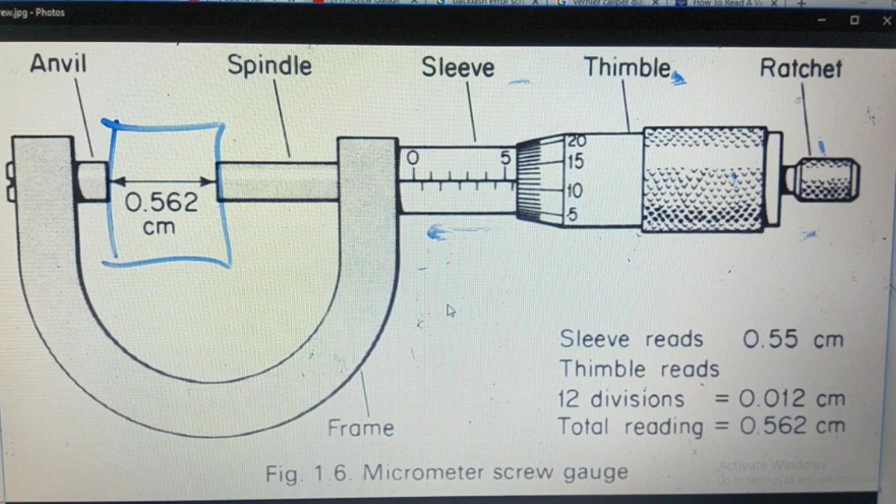And how to avoid them? Very simple. Use the screw gauge slowly, very slowly, and give it time. For example, if you have kept some object here and fixed the screw gauge, taken the reading, then remove the object and wait for some time, then rotate the screw gauge in the opposite direction so it will come out and you can remove your object outside. So basically, how to avoid backlash error is by using the screw gauge slowly and carefully. If you use it slowly and carefully, it won't give you that error.

That error is because of the wear and tear. You understand what is wear and tear?

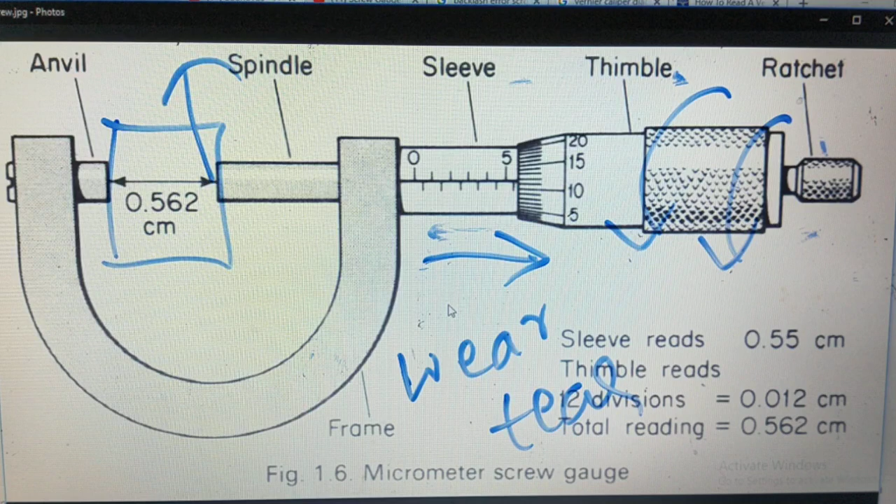Okay, so that is called wear and tear. That is the last topic of screw gauge. Now part C in this chapter is pendulum. It's a very simple topic, pendulum. I'll teach you that topic by drawing diagrams on a page. So just wait.